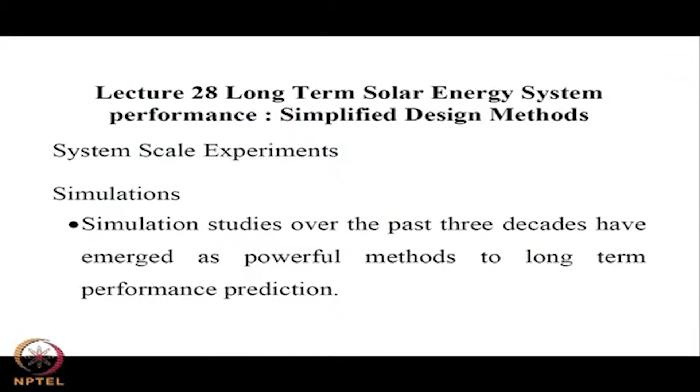So simulations turn out to be the via media - that means you mimic the solar cycle and model each component, knitting those models together, giving the output of the first module as input to the next module, like a solar collector dumping useful energy into the solar tank where the temperature increases, which goes to meet the load.

So we can develop models for a number of types of components, and these have proved to be effective, taking only a fraction of the time - it does not require a year.

These simulations basically depict the system into several components and employ models to describe each component's performance. The components are coupled with appropriate linking modules. So this requires a detailed meteorological database.

One issue is availability of the data and its ready availability. For example, if you consider the Indian meteorological stations, monthly averages are available even on the net, but if you want hour by hour data, one has to acquire it from the meteorological station or office in Pune.

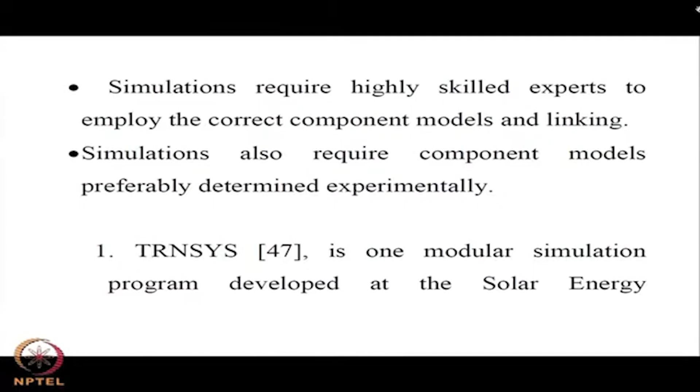So in the long run, we might say, though simulations are cheaper, they require the skill of experts to stitch together the component models, and of course they require a detailed database.

So one can look at the textbooks by Duffie and Beckman, and this program can be downloaded - a limited version free, with 40 examples given. One who is interested can go through those things.

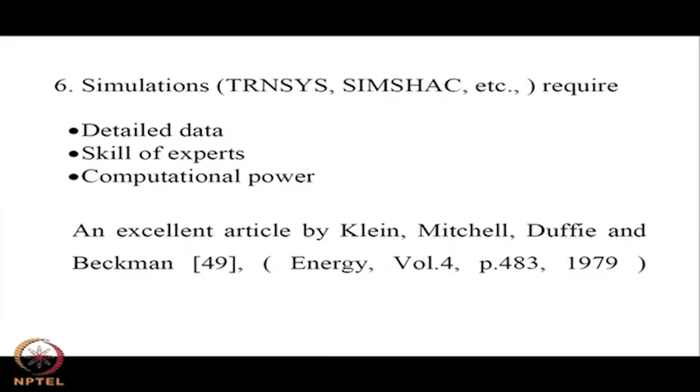And obtain the performance of certain standard systems. So that gives you a feel for how meteorological data is used and how components are put together. So in one sense, you may say the disadvantages are: you need detailed data, skill of experts, and computational power.

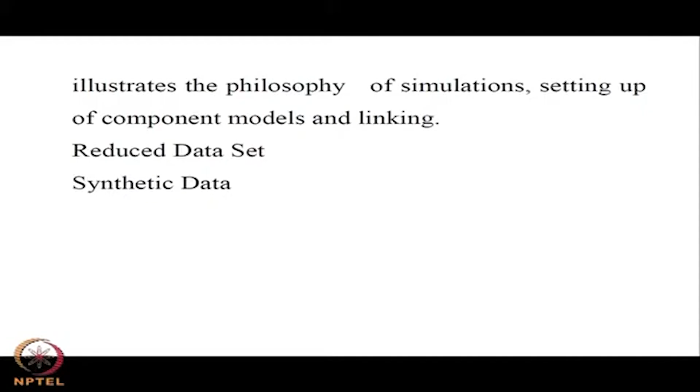So people have tried to lessen the computational requirement by using a reduced data set, or even at times resorting to synthetic data. Basically, synthetic data mimics the meteorology of the particular location, though it may not exactly satisfy hour to hour, day to day, but in general it will reproduce the averages, which are good enough to get a performance monthly wise or yearly wise.

This leads to an advantage - almost all the data can be generated through equations, though your component models could be analytical, which can be clubbed together along with this data.

In other words, to give an example, delta equals 23.45 something - this equation is much more amenable for computer implementation than a set of 365 values of data delta for each day. Now, you will also notice many of these systems are standard systems.

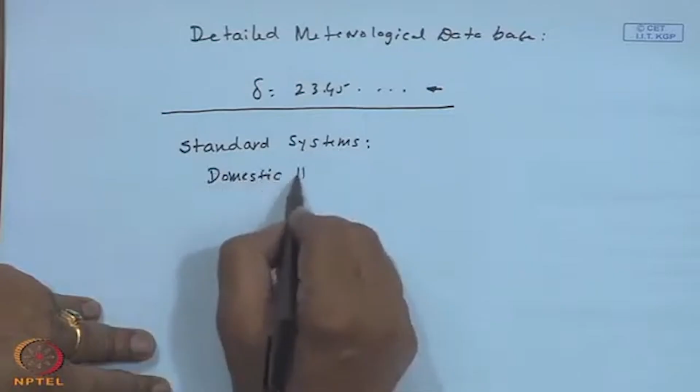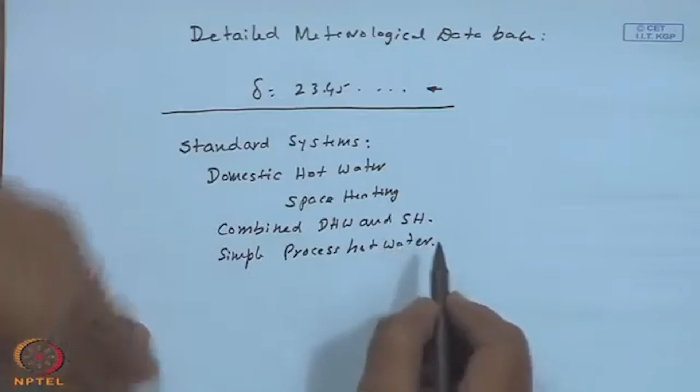The most commonly used applications could be domestic hot water, space heating, or a combined domestic hot water and space heating system, or a simple process hot water. For example, in the silk industry, cocoons are put in boiling water at a temperature of about 80 to 85 degrees, and degreasing is also done around 80 to 85 degrees. So there are a number of applications where hot water is required at a given temperature.

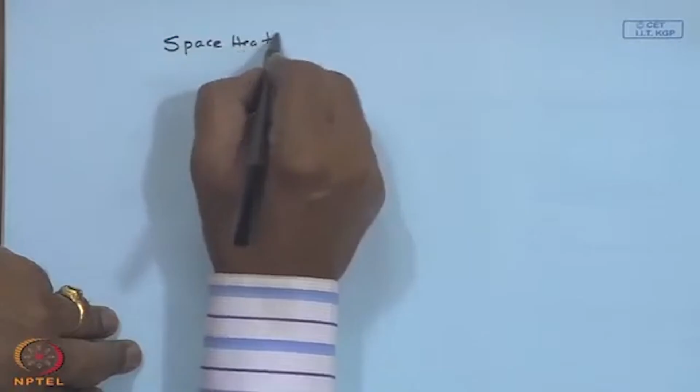These are some terminologies which have become more common in the US, which when translated to Indian conditions, one has to be a little careful about slight differences. For example, for space heating, a temperature above 20 degrees C is acceptable. Generally, the comfort condition is approximately 20 degrees centigrade in the room, so any energy available at or above 20 degrees centigrade is useful and can be utilized for the purpose of space heating.

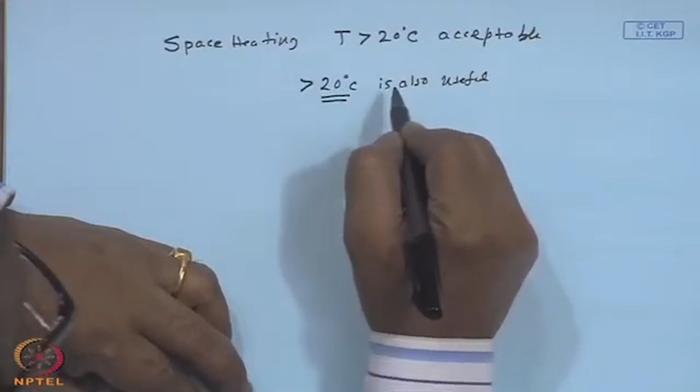Similarly, for domestic hot water, although you may be taking a bath at a higher temperature and washing dishes also at a higher temperature, anything above 20 degrees is also useful. For example, if your mains temperature is much lower than 20, like 10 or 11 degrees, even to wash your hands you need 20 degrees as a comfortable condition. So particularly in cold countries, a lot of water needs to be heated from the main supply temperature, typically 11 degrees in the US, to 20 degrees or above. The methods we discuss don't mean supply happens only at 20 degrees, it may be more, but to meet the load it is not acceptable to have anything less than 20.

Since there are a large number of applications of standard systems, people have come out with what are called design methods. Simulations do serve their role whenever you want to design a large, unconventional system, such as power generation, a solar furnace, or solar desalination. Every specific detail of that particular location has to be taken into account, and the investment may be of the order of few crores, so the simulation cost is worth it. But if you want just 60 liters of water at 60 degrees C for a domestic water heating system for bathing, the simulation cost may remain the same, but the system cost will be only a fraction of a power generating system. So simulations are not that welcome, and one goes for the standard design method instead.

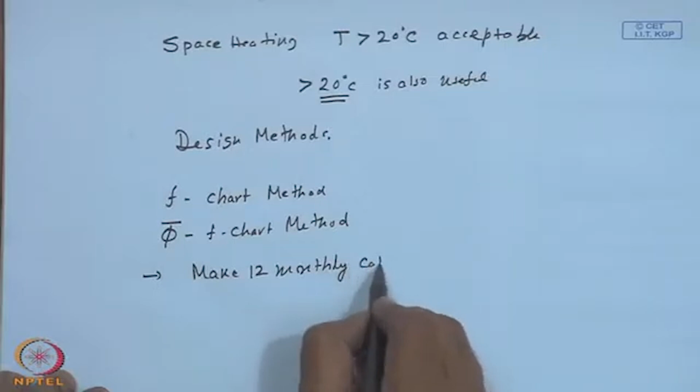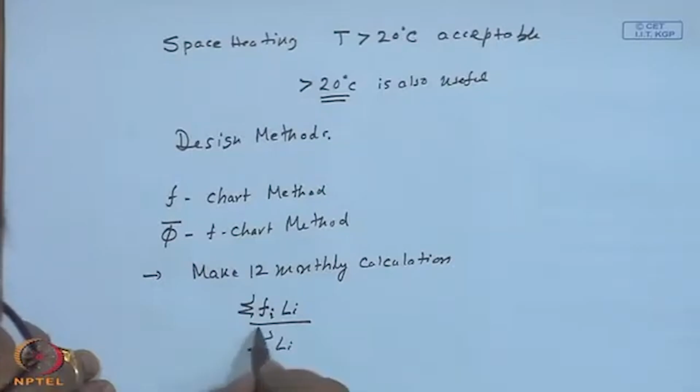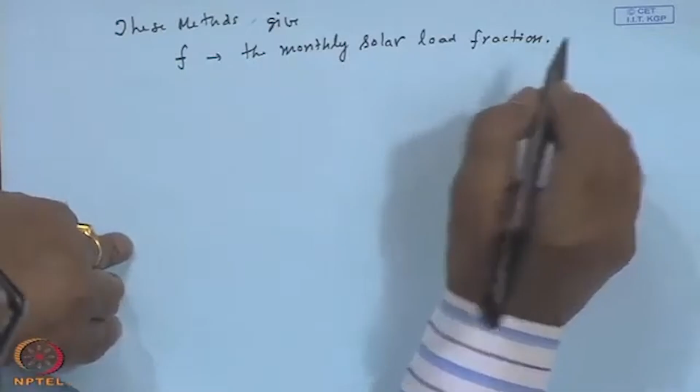As we have discussed at length, for solar energy systems, the solar load fraction is the performance indicator. If F is the monthly solar load fraction, Fi, and Li is the load on the system for month i, from 1 to 12, this gives the yearly solar load fraction. So the F chart and phi bar F chart methods will essentially give you F, the monthly solar load fraction. We have also discussed earlier that if the energy supplied by the solar energy system is in excess of the load, that excess is not taken into account, so F is always less than or equal to 1.

Now, what is the difference between these two methods? The F chart method is applicable if energy supply at or above 20 degrees centigrade is accepted. So again, contenders could be domestic hot water and space heating, and a few other such applications which accept 20 degrees C.

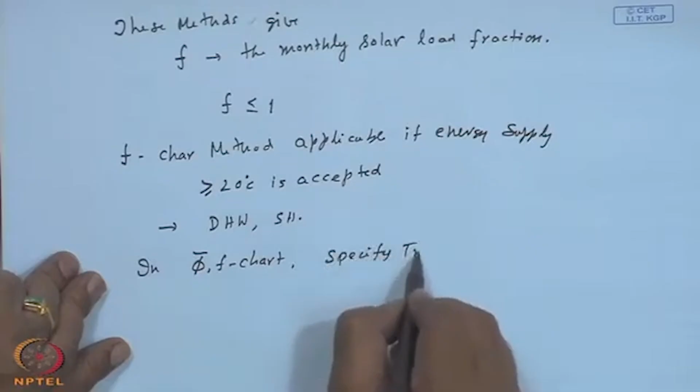And then in the phi bar, F chart method, you specify T minimum. In other words, you can specify that we want the energy delivery at or above a particular temperature, 60 degrees, 50 degrees, 80 degrees, whatever it is. So T minimum may be 60 or 80, etc.

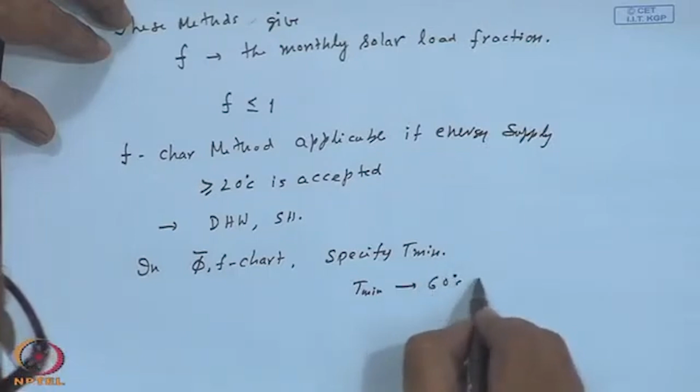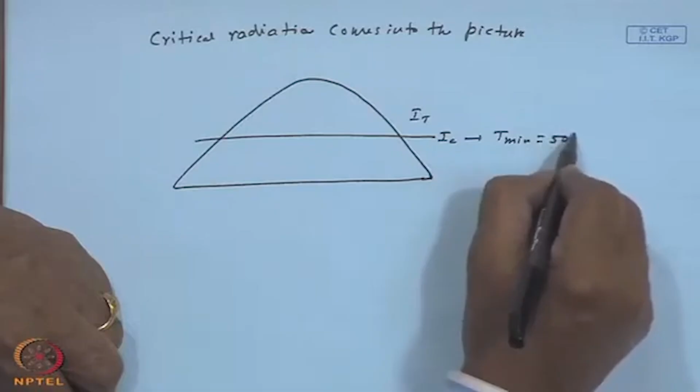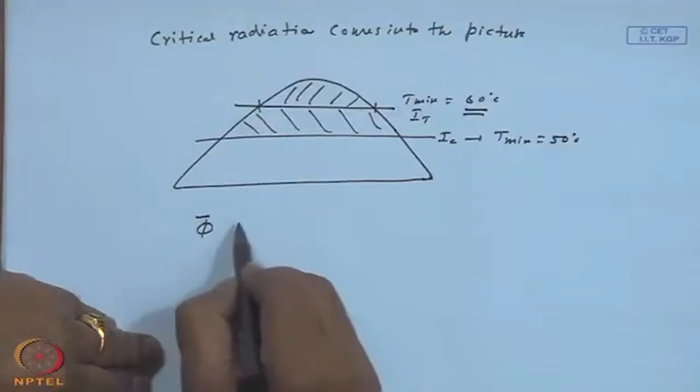Now, since you are imposing that the energy delivery should be above a particular level, the critical radiation level comes into the picture. For example, if this is a typical solar radiation distribution IT on the solar collector, this is the critical radiation level corresponding to a T minimum of 50, and this corresponds to a T minimum of 60. So if you want energy delivery at or above 60 degrees centigrade, this part of the solar radiation is useful, whereas if it is at 50, this also is useful. Consequently, we find out what radiation is available above the critical level over a month, and that is signified by the so-called phi bar, which stands for the monthly average daily utilizability.

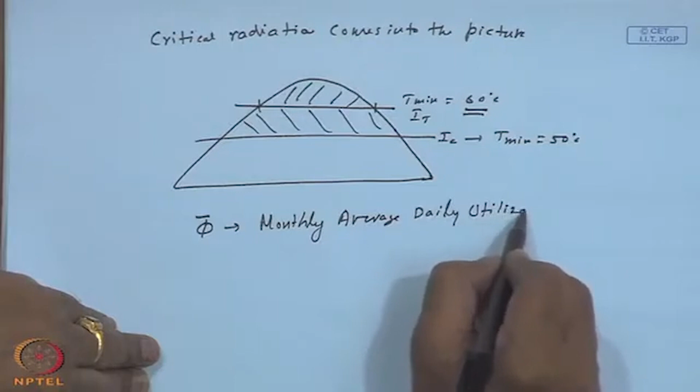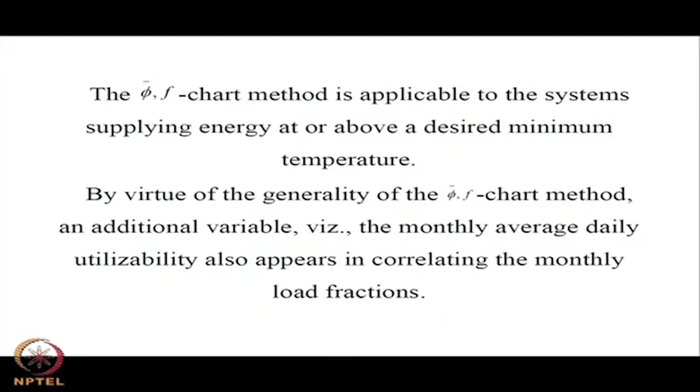We will spend considerable time on how to calculate this utilizability and its significance. At this stage, I am pointing out that the F chart and phi bar F chart methods differ because you specify a T minimum. Not all solar radiation available corresponding to a particular level is useful; it depends on the T minimum you want. Higher the T minimum, lower will be the utilizability, and hence the useful energy supplied at or above that temperature, which constitutes a lower or higher solar load fraction. That is why the F chart method is modified with phi bar and called the phi bar F chart method.

Now what are the applicability conditions? These correlations first calculate monthly solar load fraction, so day to day how much of the load is met, they cannot give. They have been developed in terms of certain non-dimensional parameters.

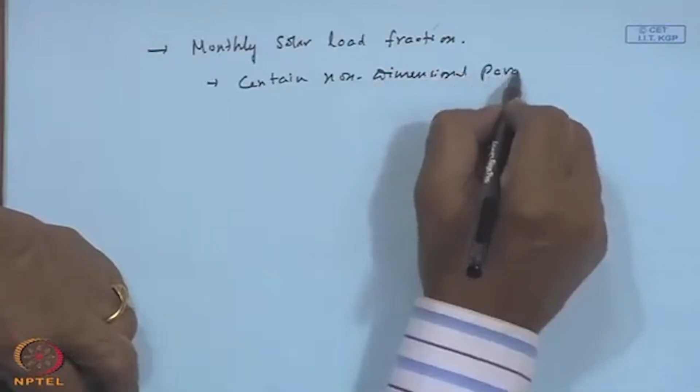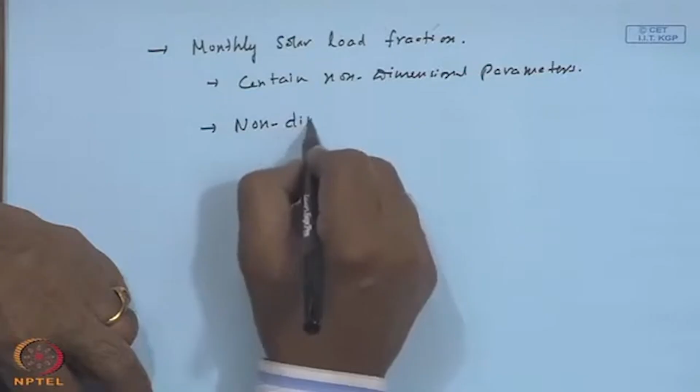There are minor variations between F chart and phi bar F chart for some reasons. One is the non-dimensional collector loss, and the other is the non-dimensional absorbed energy.

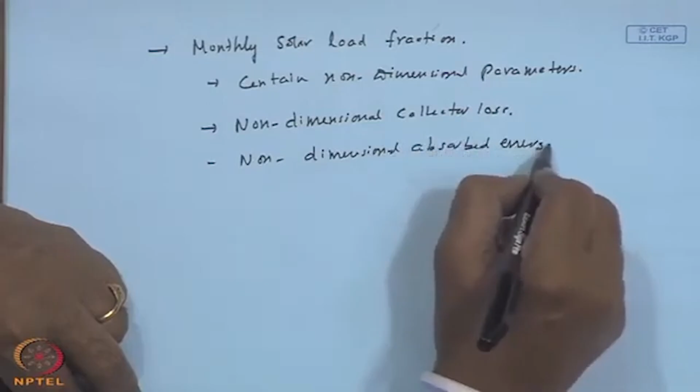If this we call x, and this we call y, approximately f should be proportional to x minus y if there are no nonlinearities, provided they are consistently unit-wise and scale-wise defined. So you can expect a term like x minus y plus so on. Sorry, it should be y minus x.

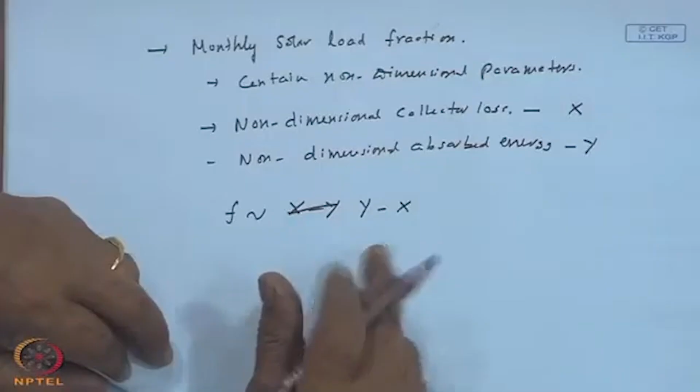Y minus X is the absorbed energy minus the losses. This is the simple useful energy equation, looking like the absorbed energy minus the loss. But on a monthly scale, because of excess energy, other losses, pumping, controls and so on, it will not be a simple linear function of y minus x, but a nonlinear function, which we will see.

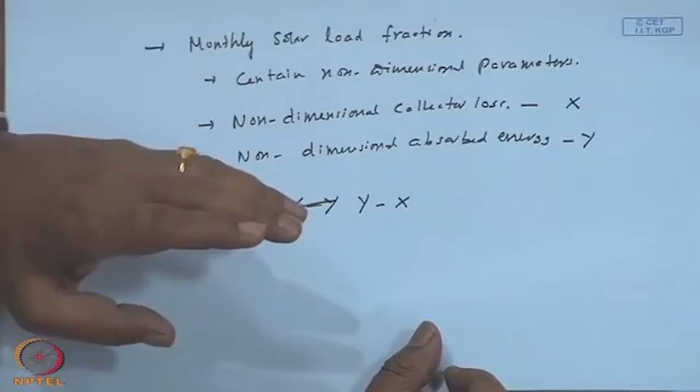So that is why I explained the additional parameter is the utilizability that appears in the phi bar F chart method, which in a way takes into account at what temperature the energy is delivered. Now how are these methods or equations developed?

You do simulations for a large number of locations, and for collectors over a range of parameter values. For example, if you consider the overall loss coefficient, typically UL may be 4 watts per meter square degree Celsius for a 2 glass cover, or 8 watts per meter square degree Celsius. So if you go from 2 watts per meter square degree C to maybe 10 watts, it will include an extremely good collector and also a fairly bad collector.

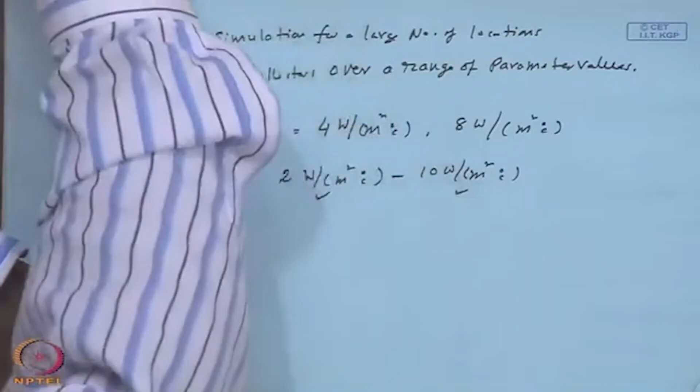Of course, suppose I do not have a heat exchanger between the collector and the storage loop, I can put the effectiveness of the heat exchanger as unity, then automatically it takes care of the collector dumping or delivering energy directly to the storage. If the auxiliary tank is not there, there will be no loss, and the delivery will depend upon the temperature available in the storage tank.

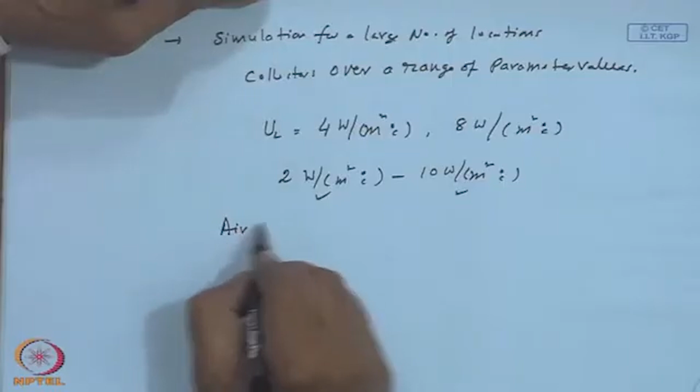Next is a typical and similar system, but air based. The difficulty with air based systems is you cannot store energy well, because the specific heat and mass product is smaller, so it requires a huge volume with losses. So what you do is store the energy in a so called pebble bed, which is nothing but a pit you can put underground with about 1 centimeter or 1 inch pebbles all packed. When there is excess energy, hot air goes through that, heating the pebbles, and when there is no solar energy, cold air goes through the pebble bed, picking up the energy stored during the charging time.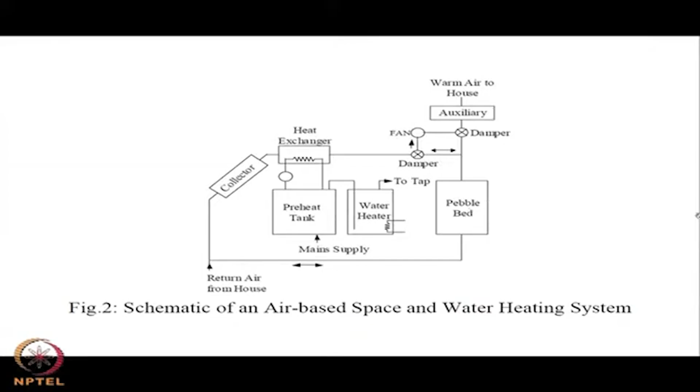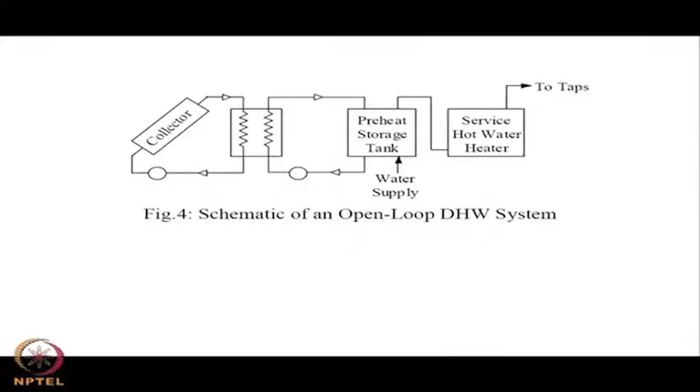So the third one is a closed loop system. Similarly, an auxiliary heater is put again in series, so that it can make up the deficiency in the temperature or the quantity. The fourth one is service hot water, which again calls for a certain desired temperature. So the F chart method can be modified to take care of a specified temperature, that we will see in the end.

Now if I try to separate the F chart and phi bar F chart methods, somebody can ask what are the limitations, or under what conditions the F chart method is applicable. So at or above 20 degrees C, generally we said that it is for space heating or domestic hot water, also used for service hot water with a modification.

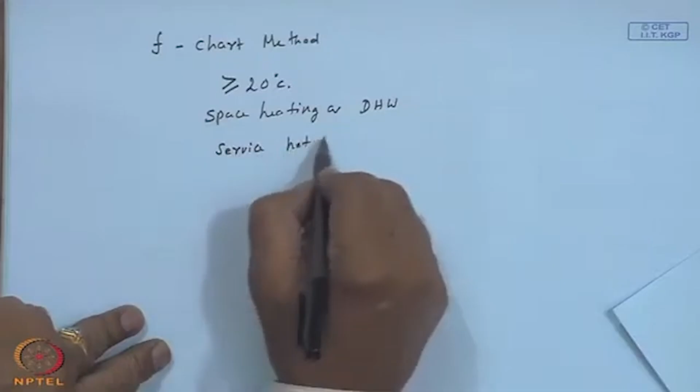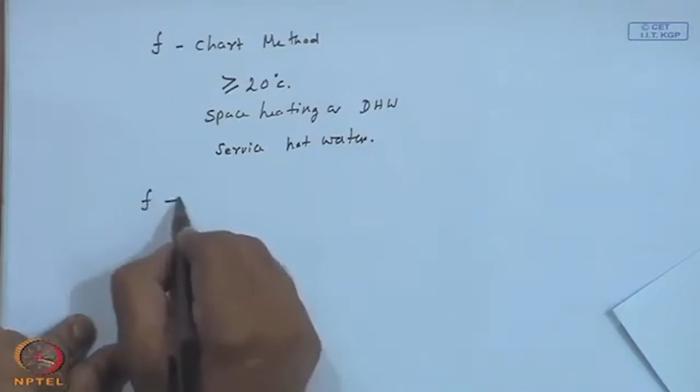And it is correlated to two non-dimensional variables: a non-dimensional collector loss. So F is a function of x and y, where x is the non-dimensional collector loss and y is the non-dimensional collector absorbed energy.

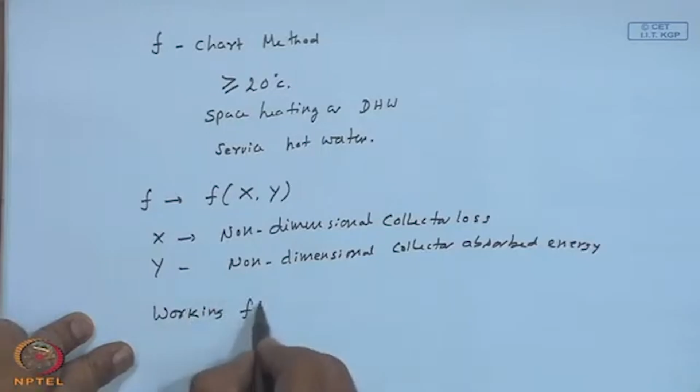The specific numbers, rather the form, will be the same. Correlation for the air based system and liquid based system differ slightly. In general, air based system means the working fluid in the collector that picks up the useful energy is air. I have not really seen or heard a gas being used instead of air, except in some refrigeration applications where people are trying carbon dioxide, etc. And the liquid based systems mostly use water, though antifreeze, glycol, etc. may be used, or a thermic fluid also can be used, where the thermal capacity characteristics will be better, so that your storage will be less volume wise.

In F chart and phi bar F chart, they assume all the collectors are connected in parallel, so that each collector receives the same inlet temperature, and if the size and everything is the same, delivers at the same temperature. Consequently, the performance will be a function of the number of collectors, or the area directly proportional.

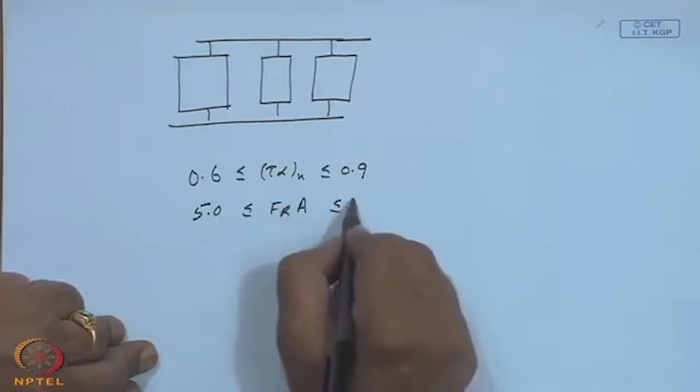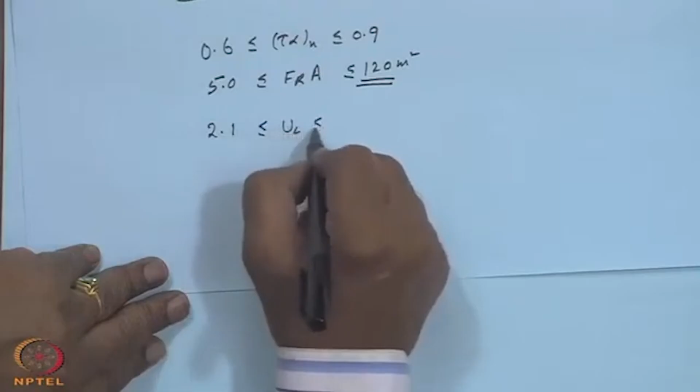This is a wide range for which the simulations have been developed, based upon which the correlations have been formulated. First, the material property: tau alpha normal is 0.6 to 0.9, and this is the product of heat removal factor and the area of the collector, up to 120 meter square. This appears to be somewhat lower, but possibly assuming linearities one can go for a higher range also. But strictly speaking, they are expected to give acceptable results only when applied in the ranges we are specifying. UL can vary from 2.1 to 8.3 watts per meter square degree C, and slope beta is between 30 degrees and 90 degrees.

This seems to be a little limitation if you apply it for a tropical climate, let us say something like southern India, where your latitudes will be lower than 30. In fact, most of India is less than 30 degrees. So this beta may be a limitation, and this will come up again.

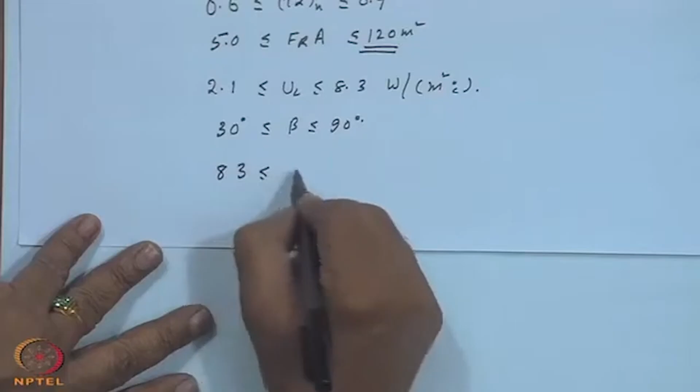Building heat loss coefficient is so many watts per meter square degree C. U is the overall loss coefficient, and A is the surface area of the building. U into A gives a product which, when multiplied by the temperature difference outside, gives the loss taking place from the house. From this loss I can calculate the space heating load.

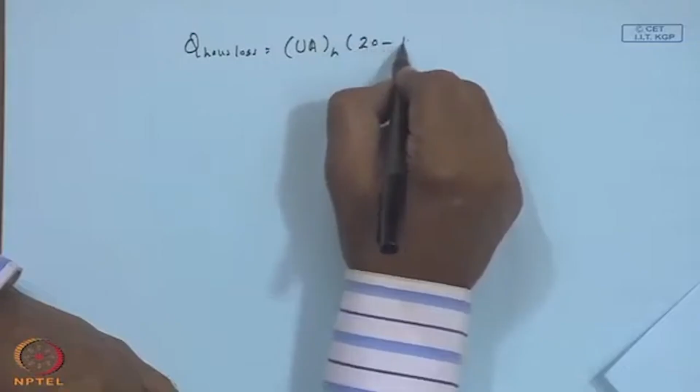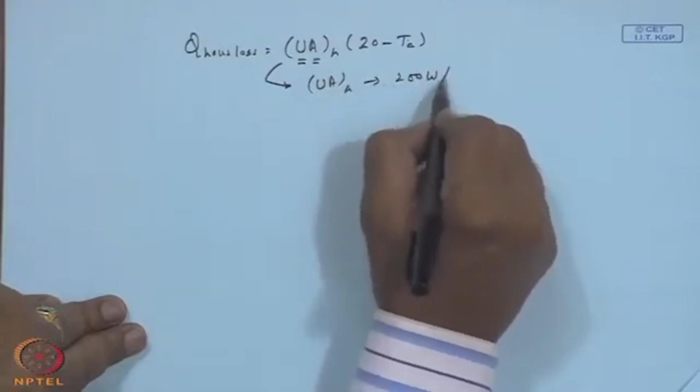If the house is going to be kept at 20 degrees C and the ambient is, let us say, 13 degrees C, then Q house loss equals U A of the house times 20 minus T ambient, in a simplistic manner, though it may have to be averaged or weighted averaged over a period of time. So this is an overall loss coefficient multiplied by the area participating, multiplied by 20 minus T ambient. This is a terminology: if you have a standard construction of 1 bedroom or 2 bedrooms, you may have a UA typically from 200 watts per degree C to 600 watts per degree C, depending upon how well it is insulated or not.

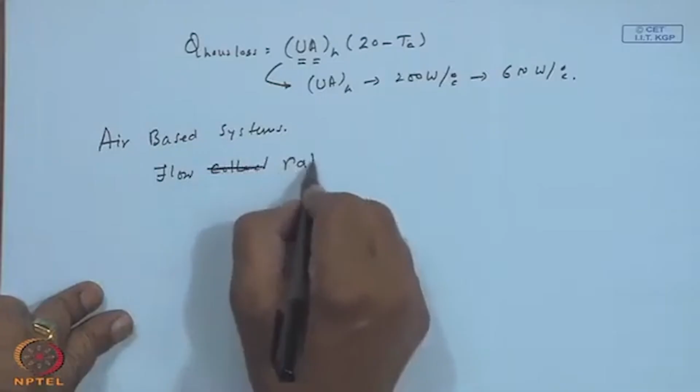So this is used for calculating the space heating load, and the other symbols like UL, FR, tau alpha normal and beta we are already familiar with. For air based systems, there are other variables beyond tau alpha, A, FR, UL, beta and UA: what is the flow rate, particularly for air based collectors? In the case of air collectors, my heat transfer coefficient strongly depends upon the air flow rate, and the stratification in the pebble bed may be seriously affected depending upon the flow rate.

In other words, you expect higher temperature air to be at the higher level because of lower density, and if a gust or blast of air goes through with high velocity, this stratification may be disturbed. Consequently, the storage performance will be affected if the flow rate is too high. So there is a standard flow rate for which the simulations have been made: that is 10 liters per second per meter square of the area.

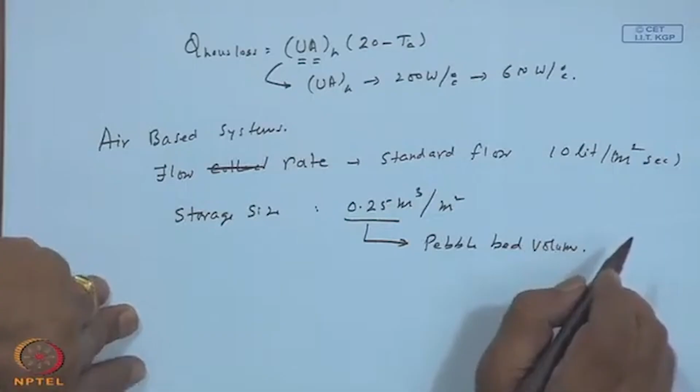So, you expect the correlation to be valid if your flow rate is around 10 liters per meter square, 9.9 is fine, and the storage size is 0.25 meter cube per meter square. This is the pebble bed volume, the pit we were showing earlier in the figure. So you provide 0.25 meter cube per square meter of area. Now, if you take into account the specific heat of the pebbles, roughly 1 inch size and randomly packed, this may correspond to a heat capacity of about 350 kilojoules, which will have something relevant in the case of water heating systems, once you specify the mass specific heat product of the storage tank, assuming the fluid to be water.

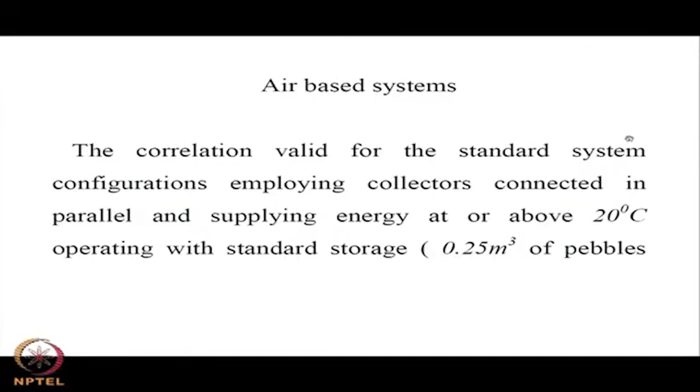So, the solar load fraction for air based systems. For the sake of clarity, I will write F subscript air equals 1.04 y minus 0.065 x minus 0.159 y squared plus 0.00187 x squared minus 0.0095 y cube, where x is

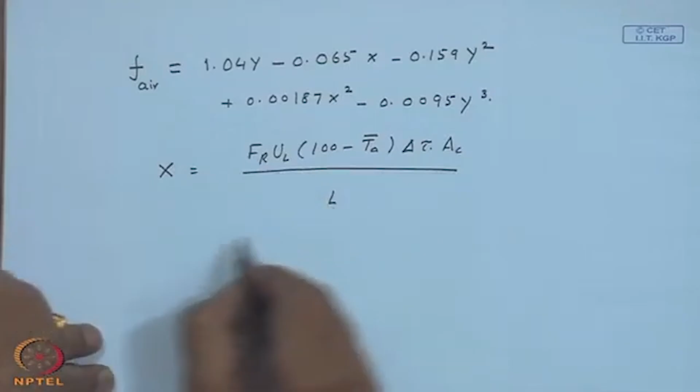the non-dimensional collector loss: Fr UL times (100 minus TA bar) into delta tau times collector area AC, divided by L. This will be non-dimensional if L is in joules, UL will be in joules per second per meter square per degree centigrade, delta tau will be in seconds, area will be in meter square, and the temperature difference is again in degree C. So this UL is in these units, and the numerator is in joules and the denominator is also in joules.

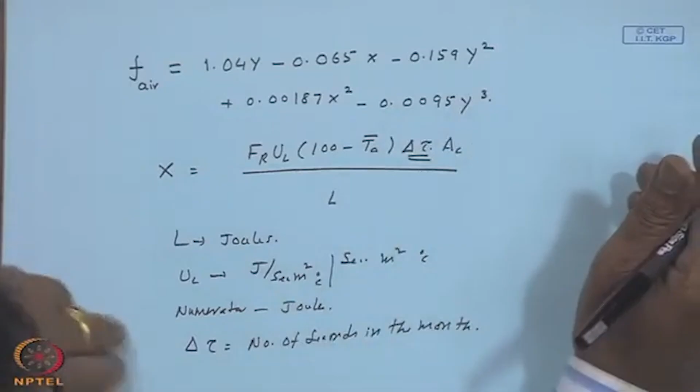Now, what you will find here is that the number of seconds in the month is delta tau, AC is area. It is not unexpected that the loss factor should be proportional to the overall loss coefficient UL.

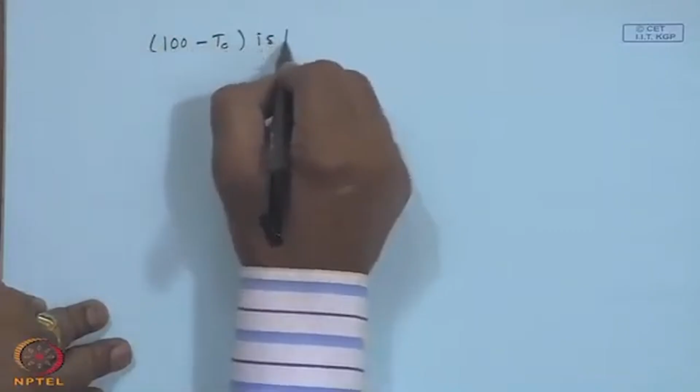Of course, this is a non-dimensional factor involving time, area, and (100 minus TA bar). This 100 has nothing to do with the boiling point of water, even though it may give that impression. It is just that 100 minus TA is used to scale x. If I used 20 minus TA, or whatever the collector operating temperature minus TA, we may get too large or too small a value for x. So it is desirable, whenever you have any empirical correlation in general, that if the variables are of comparable order of magnitude, your accuracy will be better.

If x ranges from 0 to 10 and y ranges from 0 to 3 or 0 to 4, you will have a better correlation. Instead, if y changes from 10 to the power 6 to 10 to the power 9, and x changes from 10 to the power minus 3 to 10 to the power minus 1, the effect of x on y will be completely lost, because the scales of those numbers are hugely different from each other.

So that is the non-dimensional collector loss, and I will make a comment after defining y, the non-dimensional absorbed energy: Fr tau alpha bar into HT bar times n into AC upon L. AC is the area, n is the number of days in the month, HT bar is the monthly average daily radiation on the collector surface multiplied by the monthly average transmittance absorptance product, multiplied by the collector heat removal factor, divided by the load.

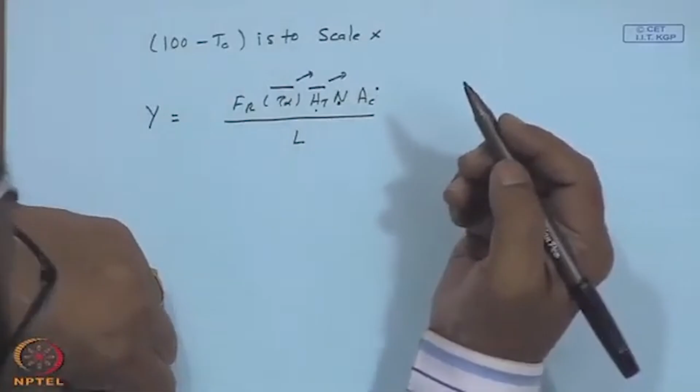Now you will understand, all the processing we have done is to get this HT bar, get this tau alpha bar, and of course, in the previous definition of x, UL and Fr - that means my collector parameters: Fr UL and Fr tau alpha. And then my tau alpha bar comprises tau alpha bar beam, tau alpha bar diffuse, tau alpha bar ground. So all the trouble we have gone through is worth it - it comes into the picture now in calculating y, and the geometry is ultimately related through Fr.

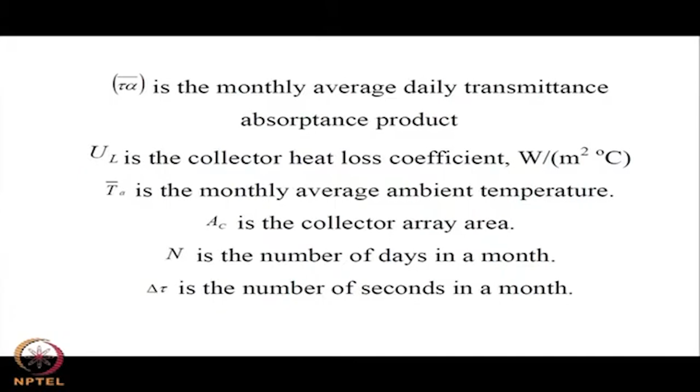So these symbols are explained, and L is the load on the system. So, given the collector parameters, I can calculate.

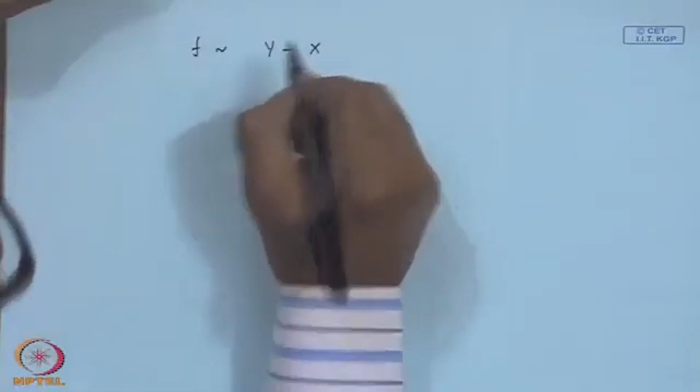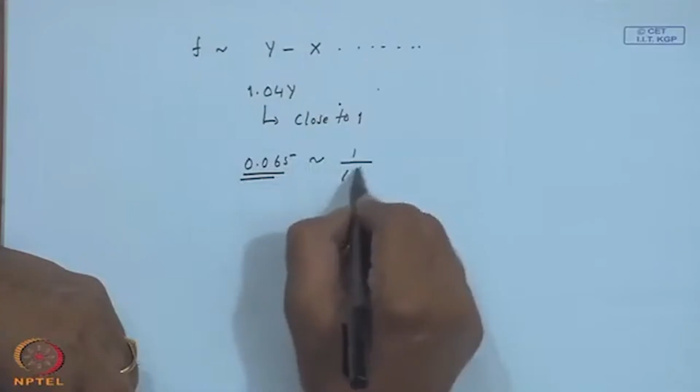Now the comment I was trying to make: initially I just said that F should be, since it's non-dimensional, y minus x - of course there are non-linearities, x squared and y squared, because of the losses etc. So the constant associated with y is 1.04, pretty close to 1, whereas this other one is 0.065, approximately 1/16th. Without the benefit of a computer, what I think is that 100 minus TA is inflated by a factor of 4, and delta tau is inflated by a factor of 4, because typically if the collector operating period is 6 hours, the losses do not take place from the collector all 24 hours.

Tank losses may be there, pipe losses may be there, but the collector is shut off. So there is a sort of overestimate of the collector in terms of the delta tau being 24 hours, and this 100 minus T_A may be typically 3 to 4 times the actual temperature difference responsible for the losses. So I have got a factor of 16, that becomes 1/16, which fortunately, according to my imagination, almost coincides with 0.065.

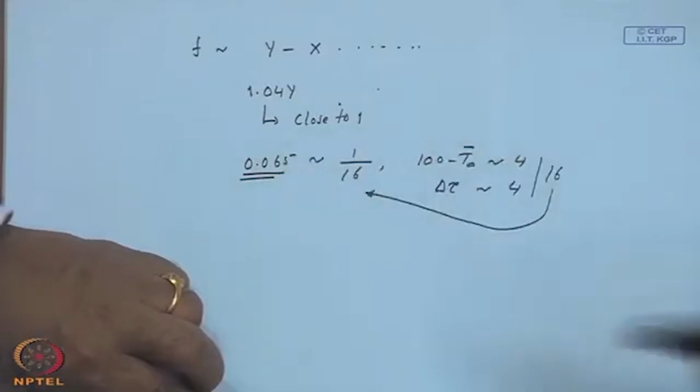So the other things are the nonlinearities. At times, why I specifically mention this is it is not just the imagination part of it. You will have a sensible correlation if you can think of what could be the functional form and what type of relation a particular dependent variable may have with the independent variables.

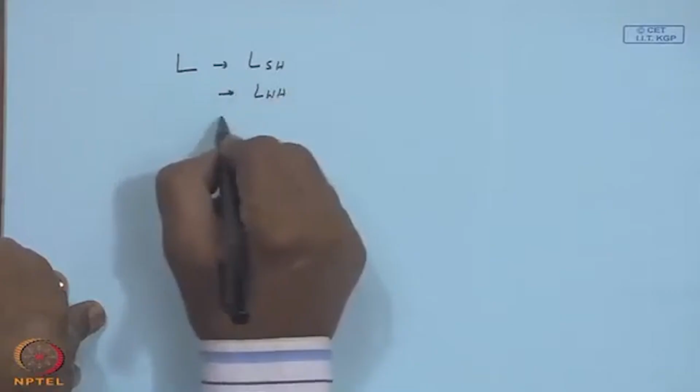So load in general may consist of space heating load and water heating load and loss from the tank. Water tank, there will be a certain loss taking place, so that is also a part of the load to be met by the system. Of course, at times this loss may be contributing to heat your room, then we will not take that into account. So we will go one by one how to calculate these things.

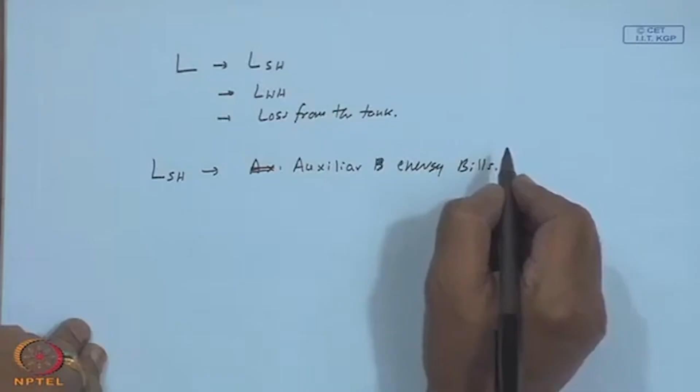LSH, the simplest way is from auxiliary bills. If it is an already occupied house and has a space heating system, be it gas heated, electric heated, or steam heated, one can find out the utility bill and find out so much is the space heating load. Or you can estimate LSH as building loss coefficient multiplied by DD.

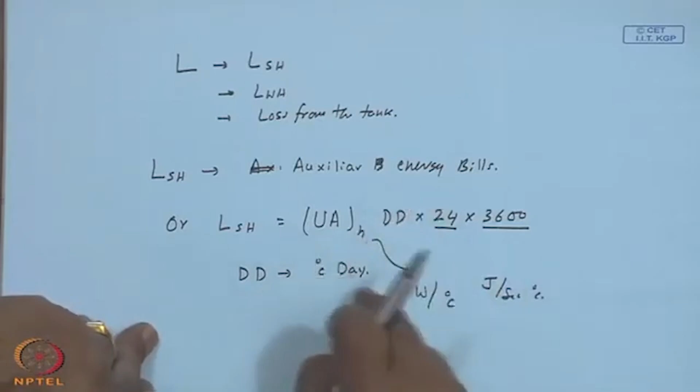DD is the degree days, not an official designation. This is degree C day, I will explain to you. This is to make it hours, this is to make it seconds, because this UA is watts per degree C, that is joule per second per degree C multiplied by second, which makes it joules per degree C. So this is degree C day, day converted into seconds.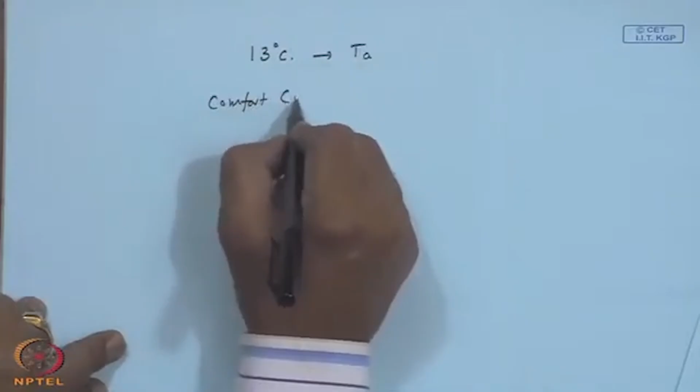If you have an ambient temperature of 13 degrees, let us say, and comfort condition is T_A, comfort condition is 20 degrees C. So this 13 is 20 minus 13, 7 degrees C short. If this lasts for one day, suppose ideally my comfort condition does not change, it is 20 degrees C throughout the day, and 13 degrees C is maintained, then this will be having 7 degree days. If the ambient temperature is 13 and the comfort condition is 20, it is deficit by 7 degrees, so you have a degree days of 7.

Now of course this 13 may be varying, for 2 hours at 13, 17 for 1 hour, 12 for 3 hours, so on and so forth. So proportionately you can calculate how many degree days each one contributes. If it is 2 hours at 13, it will be 2 by 24 into 7; 1 hour at 17 is 3 into 1 by 24; so on and so forth, and one can come out with the total number of degree days in the month.

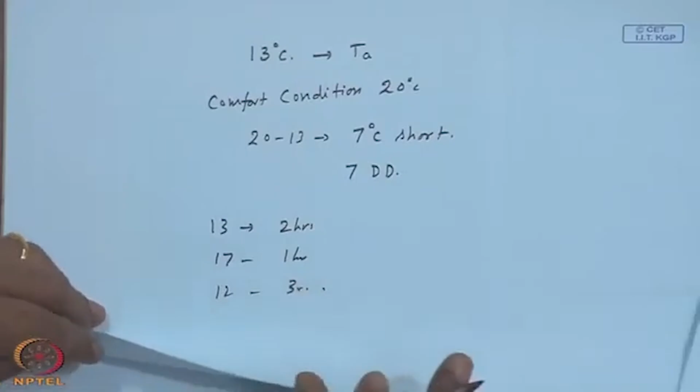That is what we are calculating. So degree C day is for the month. So you can calculate from the building loss coefficient and the degree day data what is the space heating load.

Another thumb rule, approximately: if T_A bar, let us say monthly average daily ambient temperature, which you can see from meteorological data in books like Anna Mani for Indian locations, or Duffie and Beckman for US and Canadian locations, or the Ministry of Non-Conventional Energy Sources website these days — if T_A bar is let us say 15, then 20 minus 15 is 5 degrees multiplied by 30, that will become 150 DD approximately. If my ambient temperature is 15 degrees monthly average, and 20 degrees is the comfort condition, then 20 minus 15 deficiency is there, so 150 degree days will be there.

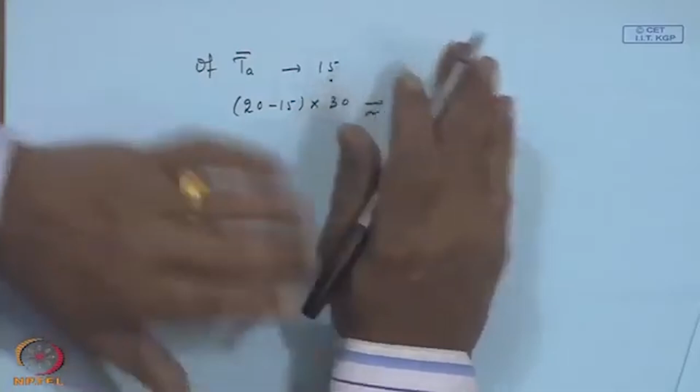Of course, the biggest approximation is this 15 may be comprising of 10s, 20s, 27s, 22s, consequently it may not always be 5. But if T_A bar is significantly lower than 20, maybe 15 or 12, this is a very good calculation. You can check yourself, and with the data available in the sources I mentioned, as long as T_A bar is less than 15, you can easily estimate the degree days within plus minus 5 degrees. Of course, if T_A bar is 20, it does not mean it does not require heating — you may need both heating as well as cooling, daytime cooling and nighttime heating.

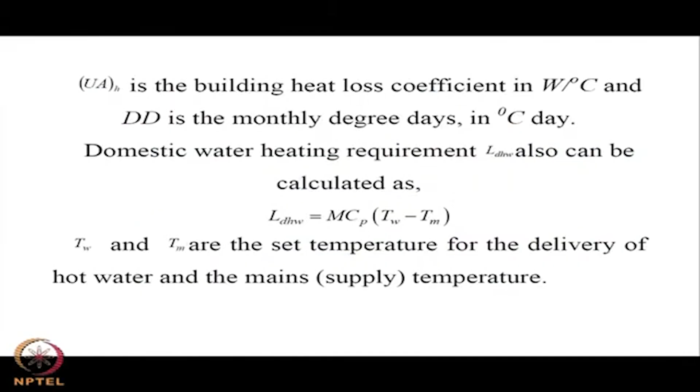Then the domestic hot water requirement, this LDHW, is mass of the water, 500 liters or 200 liters, in kgs, multiplied by specific heat multiplied by TW minus Tm. This TW, or the set temperature, is for delivery of hot water, and the Tm is the supply or mains temperature.

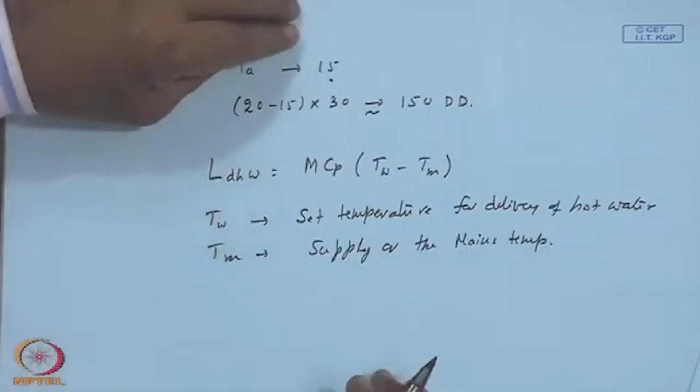Now, we have to keep in mind the fact that the best book, or rather an excellent textbook, is by Duffie and Beckman in the US. So, there is a supply or mains temperature, unlike here, which is usually the ambient temperature plus or minus a few degrees. This is something like if you imagine you have a geyser, and inside there will be a thermostat set for 60 or 70 or 55, whatever it is. Many times we may not know it, but it is set for a certain temperature, so it will cut off when the water inside the tank is heated.

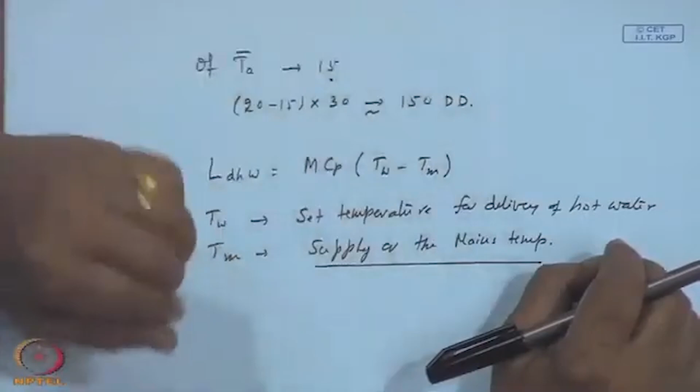So this in no way says that my solar energy system, which is designed based upon the correlation of F chart, delivers at 60. What all we are doing is, if I store 500 liters of water with the conventional system to deliver at 60 degrees centigrade, when the mains are at a particular temperature, 11 degrees C or 15 degrees C, whatever, then this is the quantity of joules we have to supply. So consequently, this is the load on the system, but not a guarantee on the quality of the energy delivered, nor is it expected.

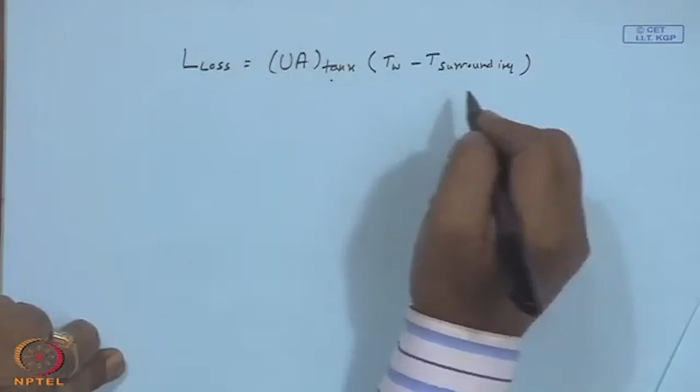So then L loss, lastly, is UA of the tank. Just like UA of the house, you can easily estimate the UA of the tank. So this is the set temperature. The tank will be basically inside at TW, losing heat to a temperature T surrounding, which I have written instead of TA. The whole tank may be in a closed basement or inside your house, so it may not be losing heat to the ambient. With this UA tank, one can estimate, based upon how much insulation is there, what is the diameter, what is the free convective heat transfer coefficient, conduction resistance, and the area of the tank, or use the manufacturer's specification.

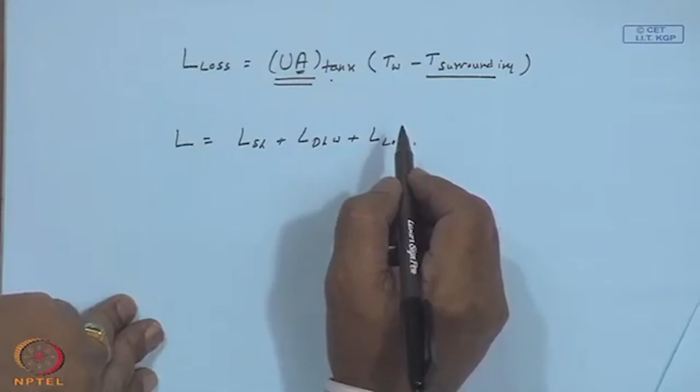So this total should not be only L loss, it should be L equal to LSH plus LDHW plus L loss, where the three components are written as UAH into DD into 24 into 3600, plus MCP into TW minus TM, and UA tank into TW minus T surrounding.

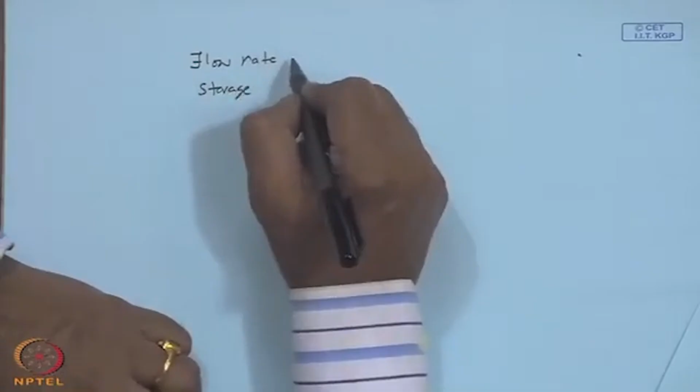Now one will ask, most importantly, because the other ranges of parameters are given, flow rate and storage—these are the two variables. Flow rate can be changed if you want to improve the heat transfer characteristics. For example, instead of 10 liters you may use 15, though pressure drop may be more, or it may go lower. For storage, instead of 0.25 meter cube, if it is a tropical climate, for the same energy or area of the collector, you may provide 0.3, 0.35, or a larger storage.

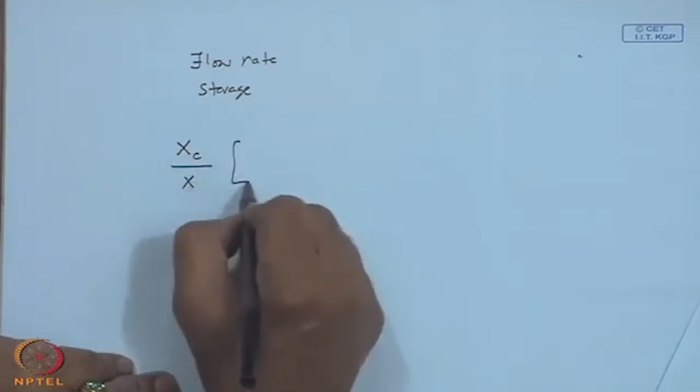So instead of another correlation for each flow rate and each storage, what they have done is, when the flow is non-standard, correct the variable x as xc equals x, the actual flow rate, by the standard flow rate, to the power 0.28. If actual flow rate is, let us say, 15 and standard flow rate is 10, this ratio is 1.5, and 1.5 to the power 0.28 is more than 1. So I will have xc more than 1. It's a little bit counterintuitive, but as I said, it has more to do with stratification.

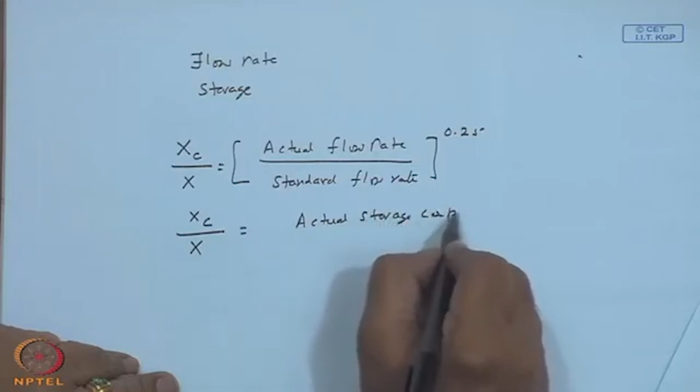So these are the correlations for the air-based solar heating system, which can be expected to deliver energy at or about 20 degrees C. For an air-based system, it will supply domestic hot water or space heating, and a combined domestic hot water system including space heating. So we will go for the corrections for non-standard flow rate and non-standard storage, as given. Simply the coordinate xc is the corrected value if x is the one for the standard storage. This is how you modify it.

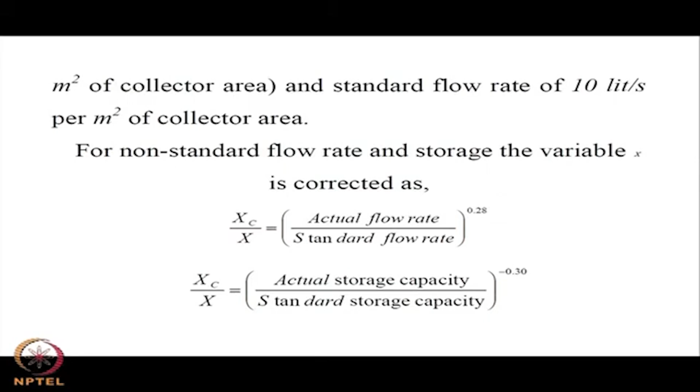Now you might wonder why x is changed and not y. The answer is these are correlations—it is found that they actually correlate with the simulation results better, and consequently x is corrected in this particular situation. Thank you.